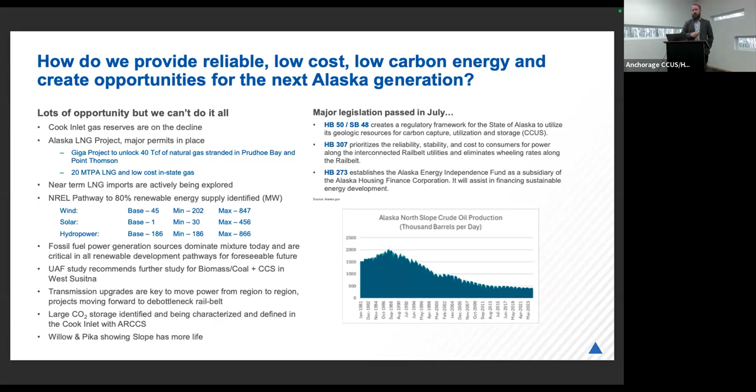I'm very excited that Willow and Pika are showing the Slope has got a little bit more life to it. There's some development coming. We've seen the plateau and the slope, but we need to be thinking about what Alaska looks like in the next 20, 30, 40 years.

Just taking the Chugach Integrated Resource Plan as an example, we're heavily dominated by fossil fuel today. Not surprising, right? We've got a lot of fossil fuel in our electrical mix, but we've got some... Aaron or Frank, make sure I'm not missing a chat question. Okay, thanks.

We've got some pretty aggressive decarbonization goals too. So while we're facing a gas shortage, we're also trying to decarbonize as a state. Hopefully we can chew gum and walk at the same time, but those are two very difficult things to do on their own. We've got to figure out how we can do both and have a reliable and affordable energy system.

Wind is one of those things identified in that study. We've got wind as part of that. But we said, okay, we have 90% where our fossil fuel system still needs to be in place, partly because of the intermittency and variability of wind systems.

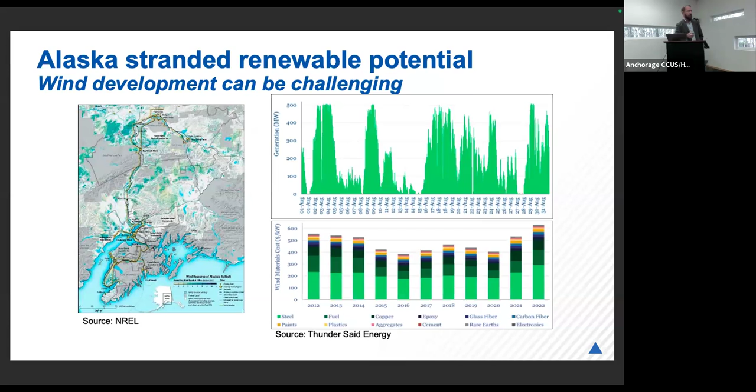So as you think about your connection to the grid, or you think about your offtake agreements, if you're making hydrogen for instance, what do you build? What are you trying to build with this type of variability in your production capacity? So how do you look at your use cases? Do you make hydrogen at certain parts of the year? Do you do some type of battery storage? Are you behind the meter? Are you doing a grid interconnection and then passing on that intermittency and volatility to the utility operator?

There's a lot of things, but there's commonality across all of them. The nice thing about this is as you solve this problem, you can repeat the solution across these different use cases. So solve it once and then repeat. But sometimes the infrastructure needs and that local power needs changes what that right answer is. And so arbitrage is the other thing—if folks aren't familiar with arbitrage, you're basically just trying to use your resource and flex what you're doing, selling electricity to the grid, for instance, or making hydrogen. That arbitrage is that ability to basically flex.

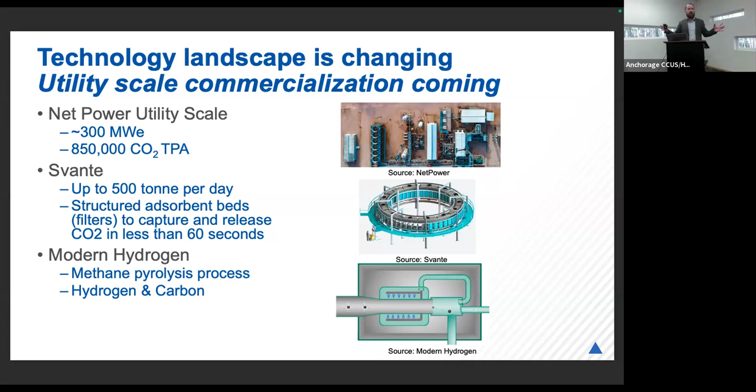People are familiar with blue hydrogen - steam methane reforming, autothermal reforming - you need carbon capture for that. This is why I'm so glad our CCUS and hydrogen groups are together, because my world lives in both these worlds all the time, since they cross-pollinate. The technology is changing so fast, and that really is difficult.

With the tax credits you have with 45Q, you can make money doing carbon capture on natural gas processing and ethanol, because you get pure CO2 and all you have to do is compress and dehydrate that CO2, and you're off to the races. So everybody along that value chain - whether capture, transportation on the pipeline, or injection - can have enough of that pie to get returns on their capital.

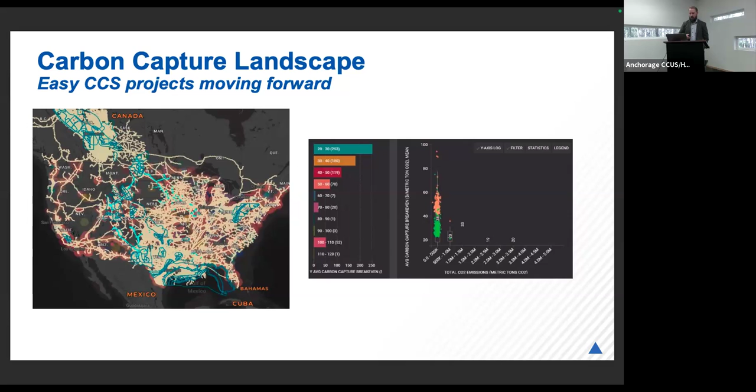So, what can Alaska learn from some of these other major projects? And when I speak, every single project is under NDA, and so I am trying to basically share themes without violating any NDA information. So hopefully I do well.

Inflation is impacting everybody, just across all industries, everybody is seeing significant inflation. That's no surprise to anybody. Our Inflation Reduction Act has not done its job, if that's what the point of it was.

I've got a graph later on where interconnections for utilities there is major bottlenecks in the lower 48. Part of that, I think, is sort of a lesson learned for Alaska is the level of intermittency that's coming onto the grid that utilities just can't take, right? So there's a lot of battery storage projects that are trying to help address that, that misbalance that you end up with.

They used to call it, in California, what was it, the duck bill or the duck curve. No longer a duck curve anymore, it's like a canyon, right? As soon as solar starts to ramp up, basically all the other sources aren't really needed, as long as there's availability.

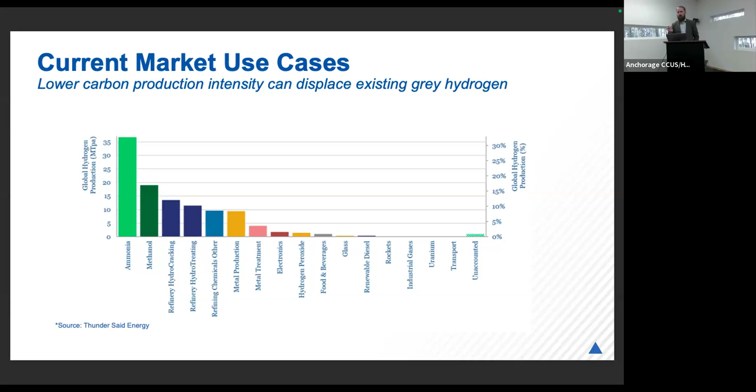Just a quick reminder for folks - where is the hydrogen use case today? It's ammonia, methanol, refineries, steel production. There are smaller use cases, but almost all of this is produced by gray hydrogen - hydrogen produced from natural gas or coal, fossil fuel based, and then that CO2 is released into the atmosphere. It's a very CO2 greenhouse gas intensive process, but there's 110 million tons per annum, so if lower carbon can displace this, it's a huge existing market.

This is where some market distortions come in, with something called the Low Carbon Fuel Standard (LCFS) in California. People were able to make money with hydrogen by taking LCFS credits. Those credits got tanked because imported renewable natural gas came into the state and drove down the price of the LCFS. So people had to increase their hydrogen price because the LCFS wasn't covering that difference, and now you've got hydrogen priced at around $30 per kilogram.

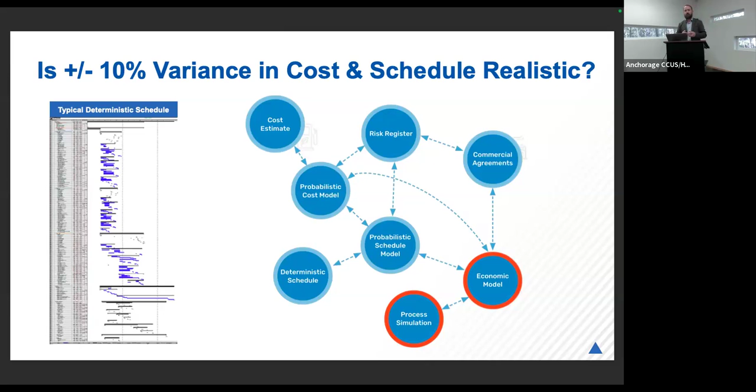A lot of times what I see is people say, well, plus or minus 10%. What they really mean is that they've done an FEL3 study or a FEED study, and they've got a bunch of deliverables. And those deliverables, as an industry norm, if they've done those deliverables, it means that they're plus or minus 10%. But they have zero statistical backup as to why they're plus or minus 10%. It's almost more qualitative than quantitative.

This kind of stems from, I've been in capital projects my whole life, and I've been working in this space, and you can hear me dork out about factory physics and a whole bunch of statistical modeling. But we have this brilliant guy that lives in Alaska, he was on the US ski team, and I said, Scott, here's these white papers, here's my textbook, I want you to build this model for me. So we were doing this at Chevron, and he said, I was talking about Excel, and he said the only thing I'll do this for you, Justin, as long as I don't have to use Excel. I said, perfect, so what are you going to use? He said, Python. So we have this proprietary model we've been working on for about 3 years now.

And we're able to take anybody's schedule, their cost, their resource loading, and statistically model what's happening with their project, and really help them understand where that risk is. So people that are familiar with capital projects, you maybe have Primavera, you have Microsoft Project, you have a critical path, you have a left-to-right analysis. This goes 5 layers deeper to really understand where the risk is in the project.

And then it helps them identify that 45% of the time, your critical path is going to go through this node, right? And we can stress test, like if this takes 1 day, you say you can get this done in 1 day, but you also are telling me that this could take 50 days, right? And your median distribution is 20 days. So you have a skewed distribution towards a risk profile on that tail. It could be a really bad outcome. And how you get your work sequence done effectively also manages that.

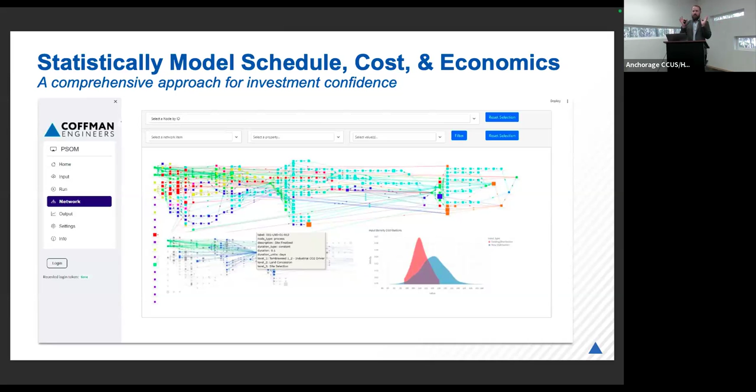So if I think about piping spools, if I get my piping spools to the site and they're not ready for them yet, well now I've got to go find a laydown area. Now I have to deal with preservation. Now I have to basically deal with the logistics of keeping the inventory of the piping spools. Or I'm trying to do SIM ops with the electrical crew, the piping crew, now I'm out of sequence, and now my crews are super inefficient. So we really are trying to help our customers, because of these thin economics with a lot of these projects, to have very robust plans, also that they can go to the bank with and get the capital developed.

I'm going to speed up here because I'm running out of time.

But they have this massive hydrogen tank, they run it through a vaporizer, then to fuel cells, and the city of Calistoga can then have 48-hour backup power. Because they deal with these wildfires in California where they just turn off the power because they don't want a wildfire. Don't blame them, but people still want power, right? So this is a combination of battery and hydrogen for long duration energy storage. It's kind of cool, it's a real use case.

With hydrogen, I deal with naysayers all the time, and I understand it. If you can use electricity, if you can use the electron closest to its form as an electron, it's probably going to be a more efficient process. You see this playing out in the marketplace today - even though these vehicles are heavier, they have more efficiency through that life cycle of using the electron to power the wheels. Conversely, using that for a Mirai, trying to get the equivalent, you've got 459 kilometers versus the Mirai's 173.

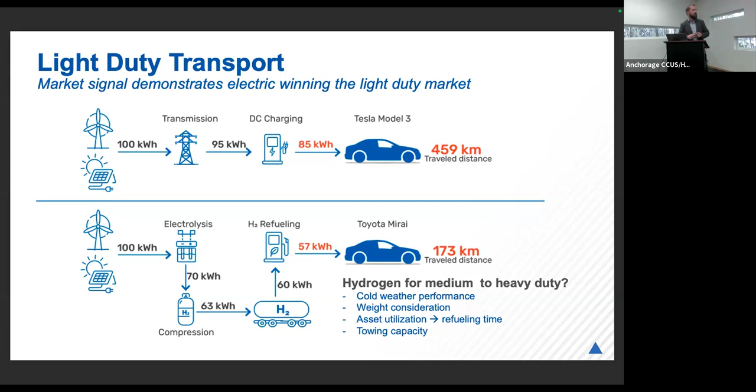We work with a lot of transit authorities, and for medium-heavy duty hydrogen, the cold weather performance, weight consideration, asset utilization, and fueling times, towing capacity - light duty maybe doesn't care as much about those things, although I've seen some lightning forum stories where it's not all roses on light duty either. We're working with transit authorities looking at diesel, fuel cell electric, and battery electric. They're planning on using electric buses for shorter routes, but on longer distance routes the buses aren't working, so they're doing a mixture. I think that's part of the right answer - a mixture of electric vehicle buses. And if you're at about $10 per kilogram of hydrogen, because of the efficiencies with internal combustion engines, that's about $5 per equivalent of diesel.

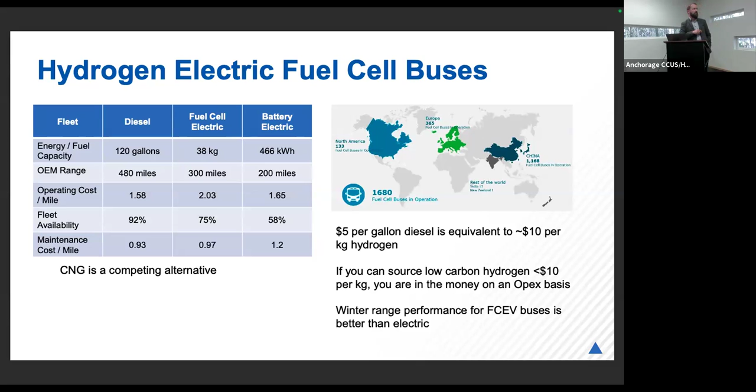Just recently, there's use cases of ferries and light duty rail. These use cases are really becoming real - these are products that cities are using. Jim Stevens here, we've been supporting him, and I think this is a great use case for excess hydrogen. City of Atka has excess hydro, so we were helping him apply for a grant where you can use that excess electricity to store energy with hydrogen storage, then convert that back to the fuel cell. Now remember, there are some inefficiencies there. Then you're able to use that for a use case in a village in Alaska, where you can use that excess renewable for long duration energy storage.

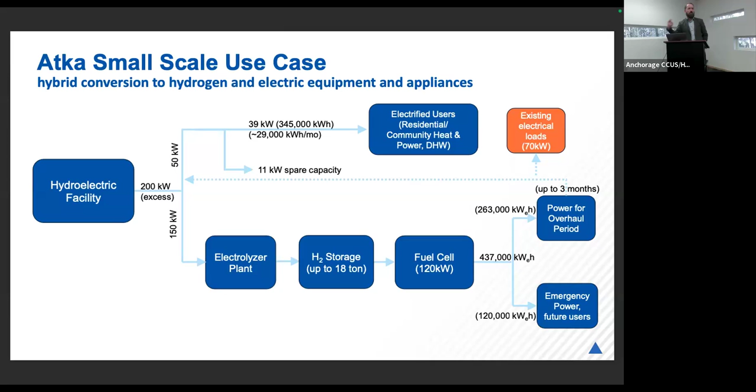The developer type really does matter. I came from a super major with a strong balance sheet - they've got mature project processes, they're a little bit slower to act, but they can go to the bond market, they're not raising capital from projects. When you talk about a renewable developer, they know renewable, they know commercial agreements, but they might have to go to the bank, and they don't know hydrogen.

Then you've got the speculative type, where they're trying to build a portfolio of projects, maybe take it public, flip it, and then exit - they're looking to get rich. But I had to learn this new vernacular: do you have a bankable project? That's meeting where the risk profile meets the investor's criteria, to secure that finance, going back to that win. The cost of borrowing is material to them, as opposed to the super majors - they're funding their projects out of free cash flow. So they do look at cost of borrowing, but really there's not truly the cost of borrowing issue, because their cost of borrowing is maybe 2-3% interest rate compared to somebody getting charged 9%.

The fully wrapped EPC model - if folks haven't heard of this fully wrapped concept - developers, more from this renewable background, are like, 'Hey, fully wrapped, go build me a solar farm.' People say, 'Great, I do that, I've built that 100 times.' They'll guarantee the price, they'll guarantee the performance, and people are taking the same approach to hydrogen, where they want to fully wrap these hydrogen facilities. The EPCs are going, 'Here's the risk, here's the cost, here's the risk, here's your cost back for fully wrapped,' and it doesn't meet the economic hurdles for the developer anymore because they've priced in all that risk. So the developer type really does matter.

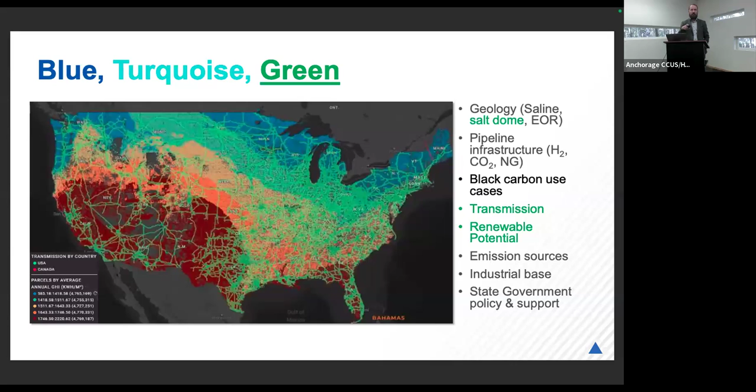There's hydrogen that's being trucked right now from Florida all the way to California. So it'll make a lot of sense. That probably won't happen in the future, but that's happening today. So your cost of your feedstock, the cost of your electricity, all of this stuff matters. So we can think about Alaska, but if we want to have an export capability, we've got to be able to compete, and the cost of your feedstock matters.

This is the other lens of the renewable potential in the United States. These are all bottlenecks. There's all these companies that are waiting for interconnection agreements to bring their renewables to the grid, and they can't get on the grid for the next 4 to 5 years because the utility operator is saying, I can't deal with all the intermittency that I have today. So they're focusing on battery storage. Now you're getting folks, you've got the 45V tax credit, and they're looking at, okay, how do I use my land position? How do I use this solar potential or this wind potential? And a lot of folks are turning to hydrogen as a potential use case.

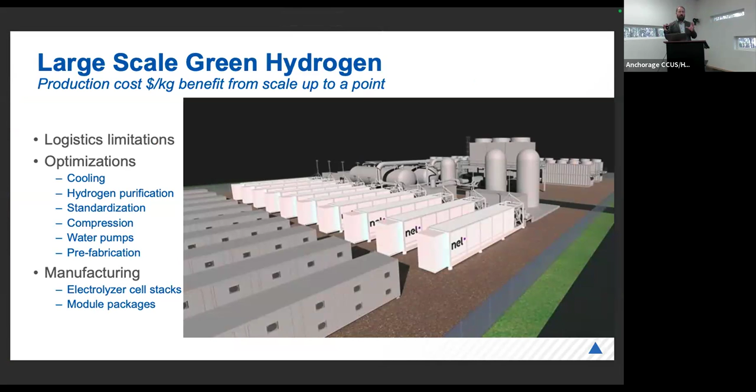Folks have probably seen this before. This is the 100 megawatt design that we've been working on now. But going back to that earlier comment there, the compression, standardization, the cooling. So if you're doing dry cooling versus wet cooling, that cooling and the water treatment are probably two of the very specific site-specific things that are very important to scaling green hydrogen.

Ten minutes. Yeah, that clock's like 8 minutes. No, it's fast, I tell you, get more time. So hydrogen as a feedstock, I probably spent too much time in the beginning, but you give me talking, I just like talking about this cool stuff.

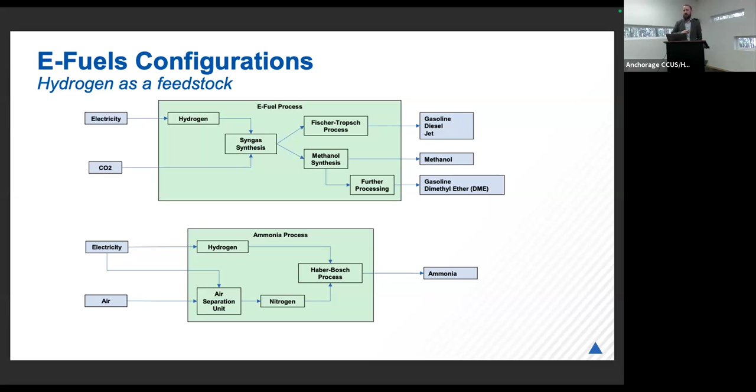So e-fuels, the overall process: you're combining electricity and hydrogen with CO2 through a syngas process. Now you can basically make methanol, jet fuel, gasoline. And then the ammonia process: taking that electricity with hydrogen and nitrogen, you have an air separation unit, which is a very high capital investment. That ammonia process then makes green ammonia. So just remember those two processes. Nobody needs to turn into a chemical engineer overnight, but that's the high-level equivalent.

So just to think about how much the electricity going out equates to useful heat on the back end. There's a lot of ways to heat into these processes, potentially for heat recovery or low-grade city heat to then create 1,000 gallons of e-fuel. So you're looking at 94 megawatt hours to the equivalent of 37.5 megawatt hours equivalent energy in that 1,000 gallons of e-fuel. A lot of heat rejection where you're using that heat for that energy.

And that's with the pure CO2 supply. Frank was just commenting that doesn't account for the potential energy losses of capturing that CO2. I think that's probably where Frank's comment was going.

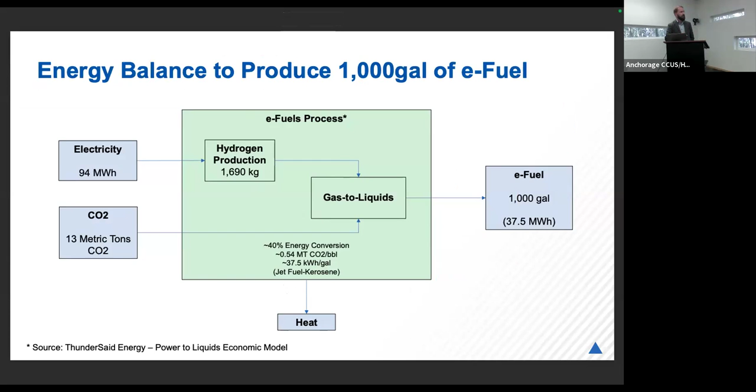What's ammonia used for? It's used for food. I mean, this cost translates into other markets. So people are paying $300 today, and they're paying $1,200 tomorrow. That's going to translate into higher fertilizer costs, that's going to translate into higher grocery bills. So it has a knock-on effect. And then maybe a mining company just wants to blow stuff up with some green, green TNT.

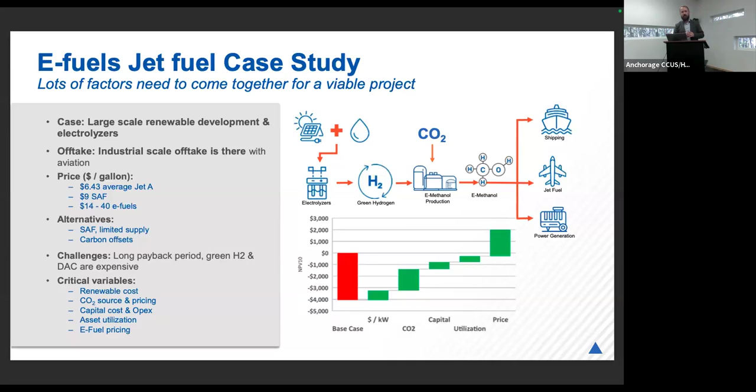So we need markets, we need rules, we need the market to pick the winners and losers. It's fantastic that the DOE is helping get some of this base infrastructure, the IRA is getting this base infrastructure, because as you depreciate those assets, what I can sign up for in contracts in 20 years is different than what I need today to get that infrastructure off the ground. But we're going to need to move to a market-based economy in order for this to be sustainable.

And then we want to make sure that Alaska is picking the industries and the investment that the state makes into jobs that are going to have sticking power for that next generation. With that, that's all I have.

One minute for questions. Okay, so we have two questions in the chat. One is from Ed Donaldson, asking you to comment regarding how much future effort is going to shift to carbon negative zero in contrast to the more commonly known net zero 2050 approach.